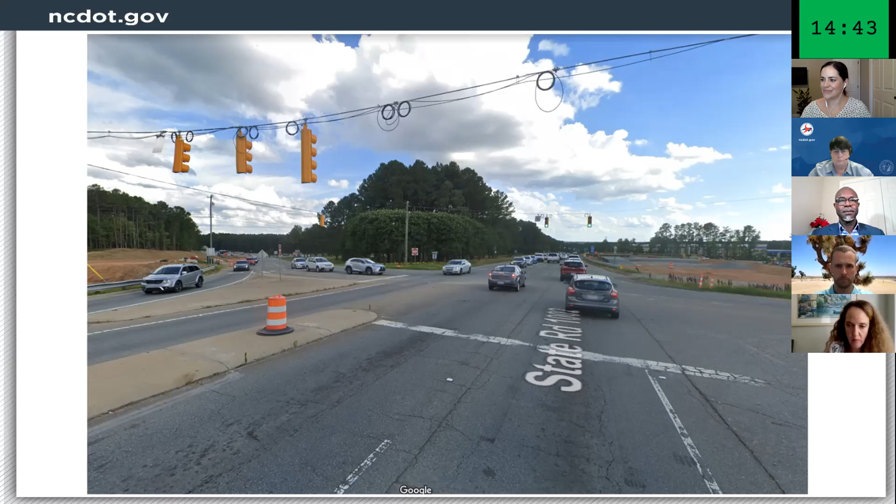Here's the thank you. All right, so kind of a theme today is out with the old, in with the new. Aviation Parkway interchange is our first topic. So out with the old: heavy congestion, I-40 westbound traffic exiting to southbound Aviation. Traffic consistently backed up to I-40, creating safety issues. The westbound I-40 on-ramp acceleration lane was too short, creating merge issues on I-40. Next. The 4-lane bridge cross-section was functionally obsolete and inadequate to handle the demands. Next.

So in with the new, a $36 million investment was let to contract in February of 2018 and provides the following improvements. I-40 westbound movement to southbound Aviation is provided by the new loop in the northwest quadrant. This loop opened in early 2020, 2 weeks ahead of schedule. I-40 eastbound to northbound Aviation has dual left turns. The new 6-lane bridge accommodates true dual through movements as well as lanes for exit and turning movements. This bridge was opened in November 2020. The westbound I-40 auxiliary lane connecting Aviation Parkway on-ramp to the off-ramp for Airport Boulevard has been constructed.

Although NCDOT was severely impacted by COVID through traffic volumes from a revenue standpoint, there were several 2020 closures associated with the construction that were aided due to the reduced volumes. So in early April 2020, traffic volumes were down 54%, allowing us to perform a weekend closure of both directions of I-40 to demolish the old bridge. And pre-COVID, I-40 between Harrison Avenue and I-540 carried between 150 and 170,000 cars per day. Next.

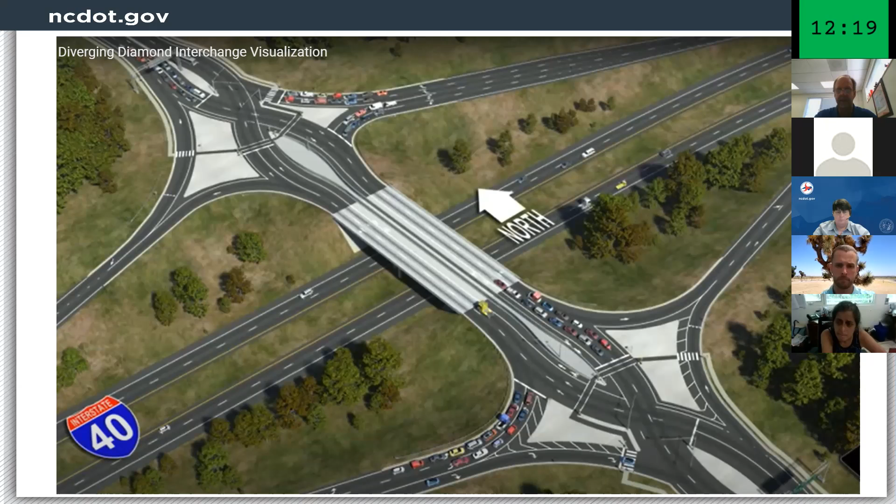Construction of a diverging diamond interchange. So the DDI configuration crosses Airport Boulevard traffic to the left-hand side of the road. Next. The traffic entering and exiting the interstate does not have to cross opposing traffic to make the turn. Basically, the left turns act as traditional free-flow right turns. This simplifies signal operations, providing for increased capacity. Next.

So although many DDI bridges are a single bridge, like the one seen here in the Charlotte area, our plans at Airport Boulevard call for 2 separate bridges which will be built on either side of the existing bridge. If you have not driven through a DDI, get ready. We have many more coming in the area, including 3 being built with the next 2 projects being discussed. The completion date for this project is February 2024.

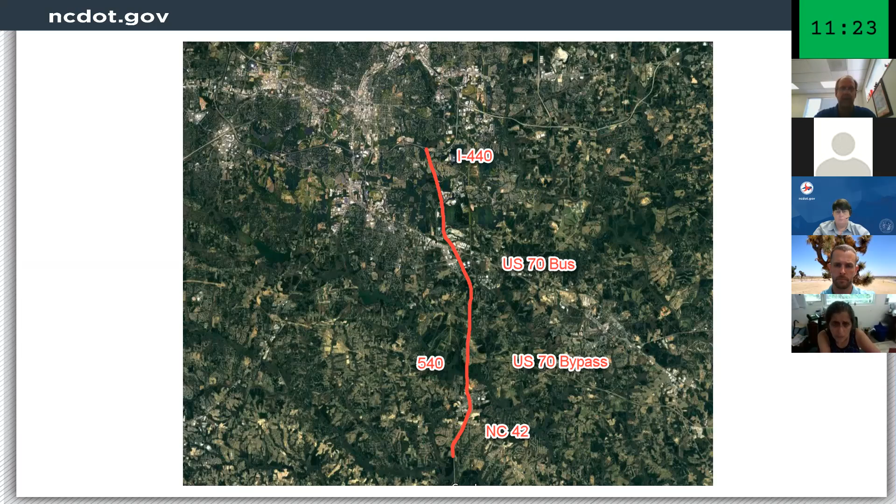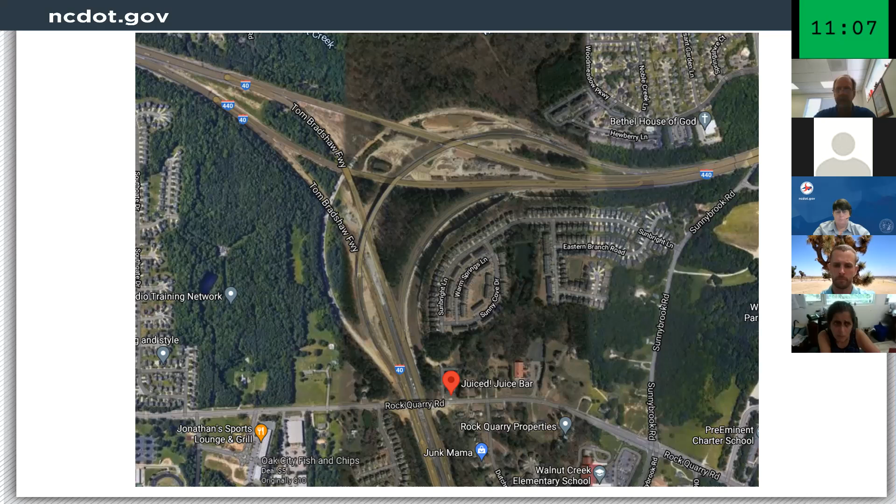Next. So we're also in the process of widening 14 miles of I-40 from I-440 to NC 42 in Johnston County. Next. This $360 million design build project will add 2 lanes in each direction of I-40. The design includes reconfiguration of several interchanges along the corridor. Here you can see the newly completed flyover ramp from 440 to 40 East, which shifted to the east from the original alignment. Next.

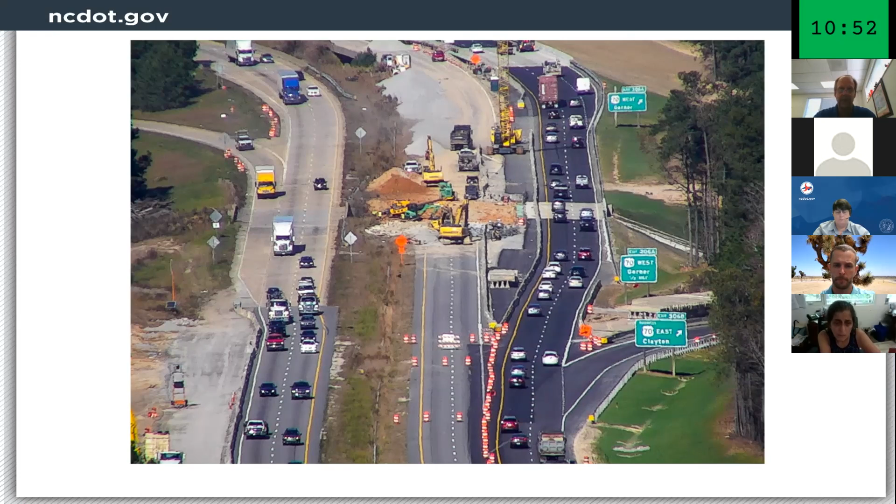So keeping with the out with the old, in with the new theme, maintenance of existing traffic is always a challenge: as you build new, you shift traffic, you demolish old, and you once again build new. Next. The project also includes the reconfiguration of the I-40 NC 42 interchange. It will be a diverging diamond interchange with additional access to Cleveland School Road. There will also be a diverging diamond interchange added at the Jones Sausage Road exit interchange area near the new Amazon distribution facility in Garner. Next.

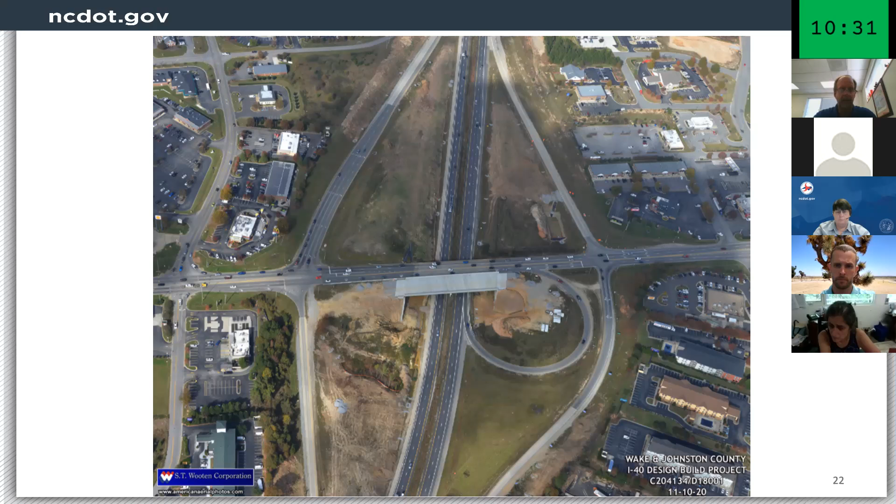So getting back to NC 42 at Cleveland School Road, these 2 areas are connected by a collector distributor system. So we're pushing to get the new lanes open from 440 to US 70 bypass by the end of next year, with the remaining work completion likely in 2024. Next.

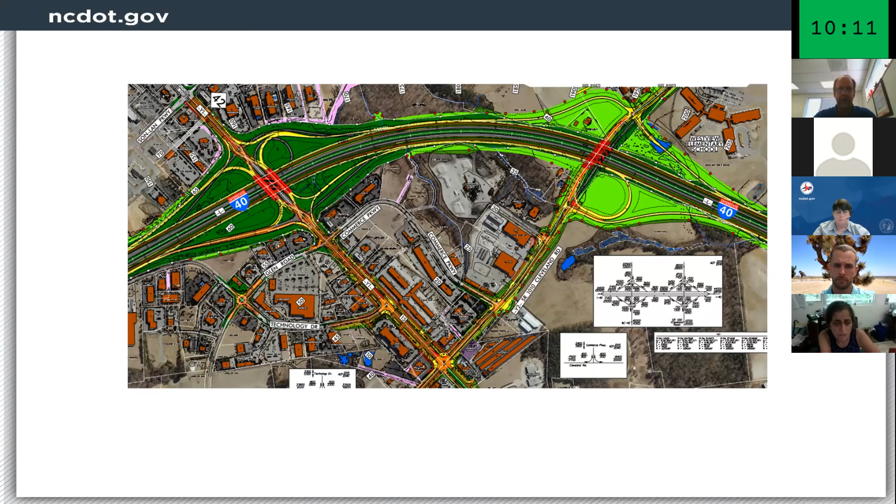All right, so the East End Connector in Durham County. So we're completing the East End Connector in Durham to provide a direct connection between the Durham Freeway and Miami Boulevard, US 70 and NC 147, 2 major east-west highways in the Triangle, and improve access between I-40 and I-85. Next.

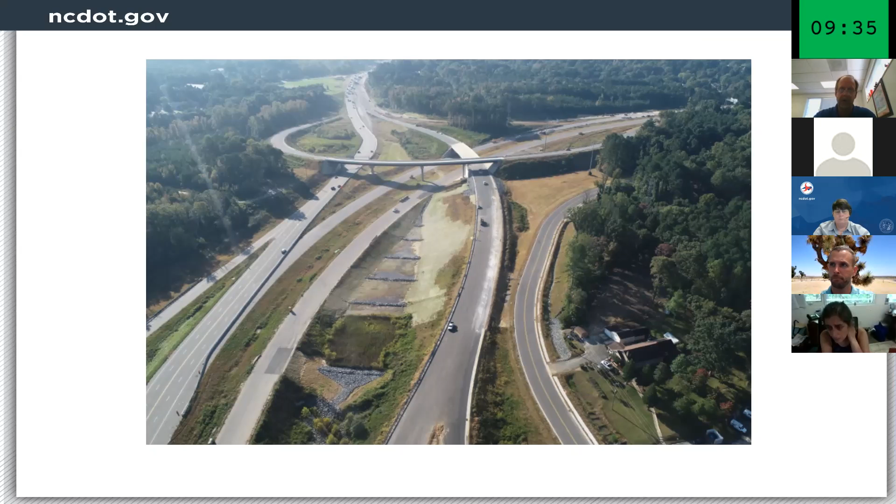The $142 million project began 6 years ago. Next. Although only about a mile separates 147 and 70, this project is complex due to maintaining traffic on 147 and 70. Majority of the work was bridge construction and coordinating with 2 railroad companies. Next.

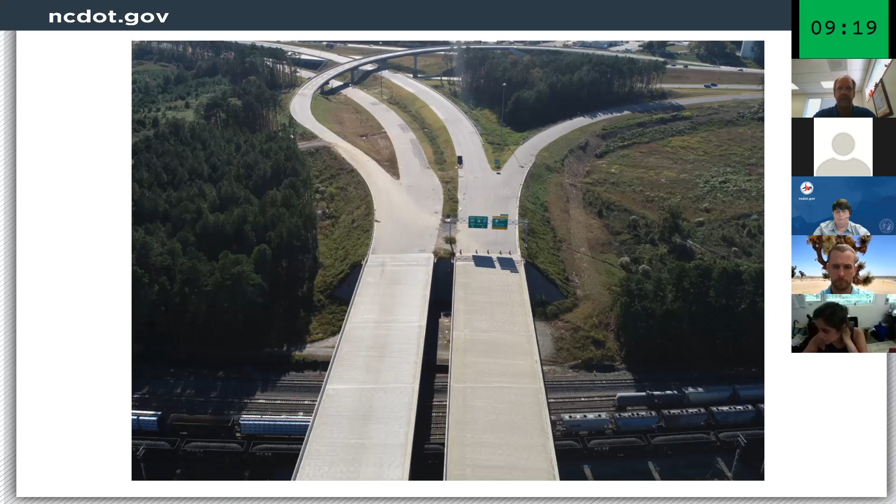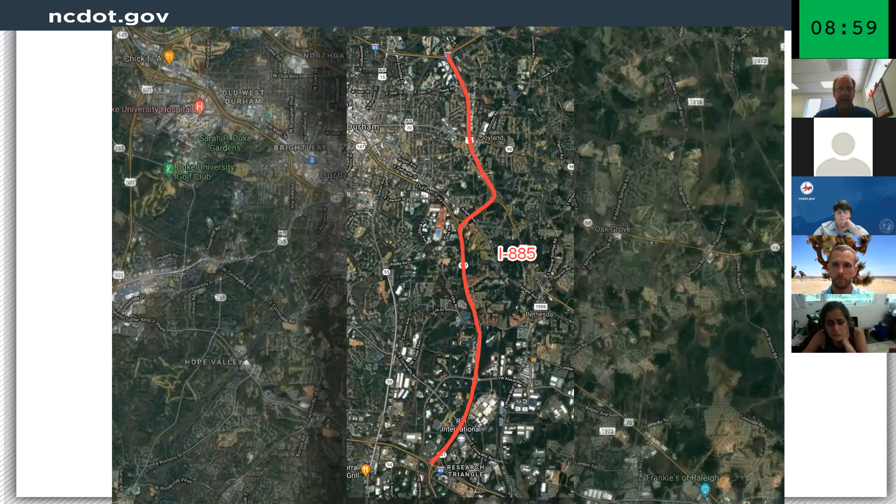Although we continue to push to open the connector by the end of 2021, a spring 2022 opening is more realistic. Next. As we place traffic on the connector, there's going to be a new route designation included. That's going to be I-885. Next. So I-885 will be signed from I-40 along current NC 147 through the East End Connector and then along current US 70 to I-85. Next.

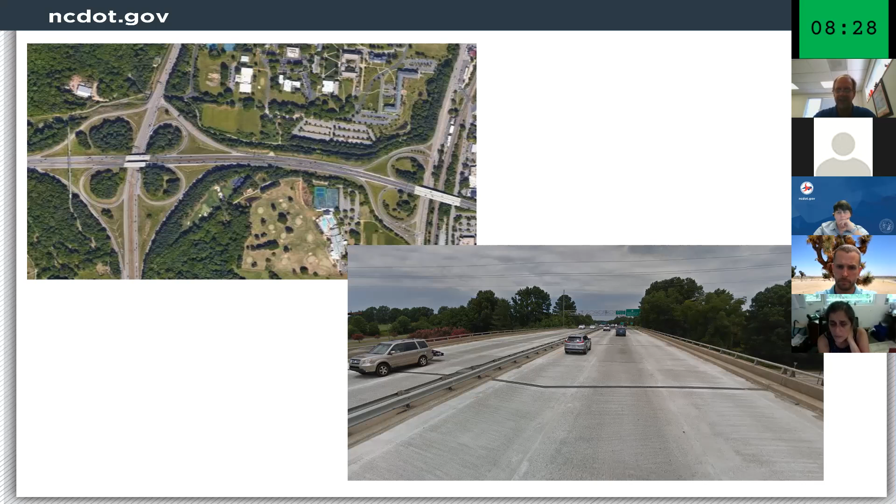Now we're going to transition to the Beltline project, U-2719. So out with the oldest section of I-440 built in the 60s from just north of Wade Avenue to south of Walnut Street. This project does not include redesigning of the I-40 interchange, but the old section of the Beltline was a 4-lane section. The pavement structure was at the end of its life. All the bridges were functionally obsolete. All the interchanges were outdated designs and had bottleneck congestion issues throughout the corridor. Next.

So this $400 million investment is being built by a design build contract awarded in October of 2018. Work began shortly later in July of 2019. So in with the new, modernization of the entire corridor, including pavement structure, bridges, interchange designs, and going to 6 lanes. Next.

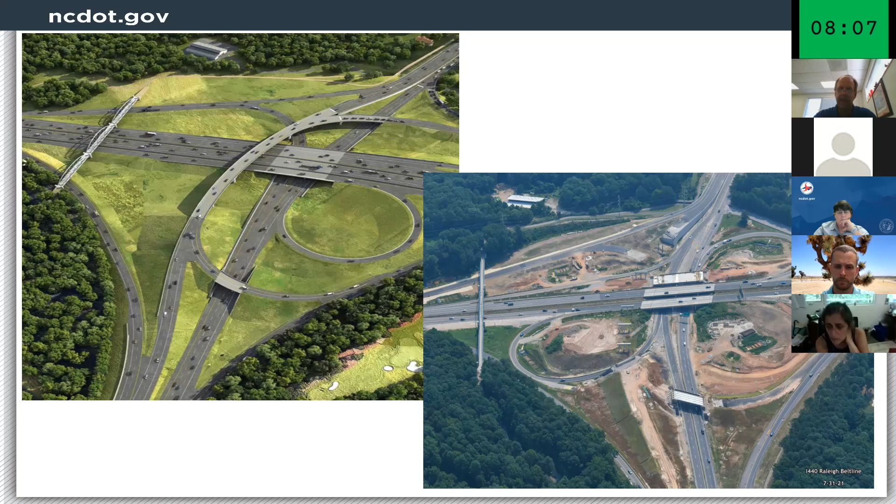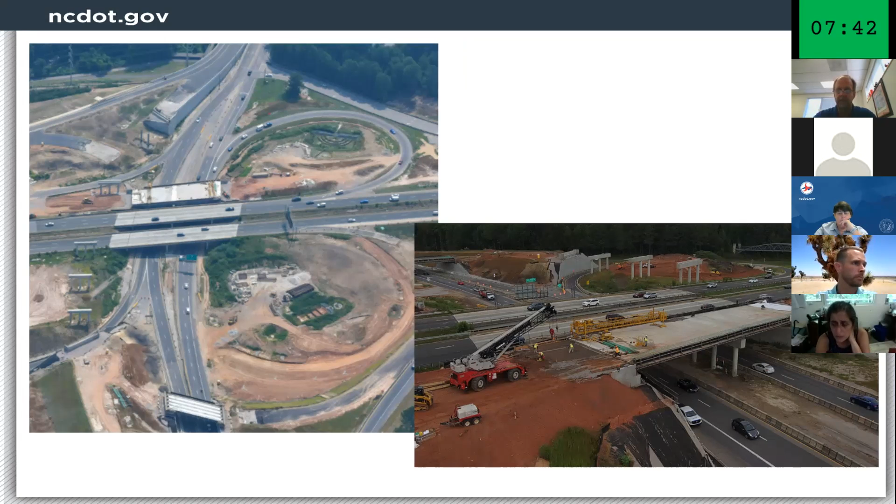Here at the Wade Avenue interchange, the existing interchange is served by 3 loops, which create slower speeds and weaving issues. The new interchange will only have 1 loop in the southwest quadrant. The current main line is served by 2 bridges. The expansion creates a 3rd bridge, with the westernmost bridge being part of a collector distributor access for the interchange with Hillsborough Street. Next. Moving down to the Hillsborough Street interchange, the design of the interchange is really just a larger footprint of the current interchange to allow for additional lanes on 440 and better movement between Wade Avenue and Hillsborough Street. Next.

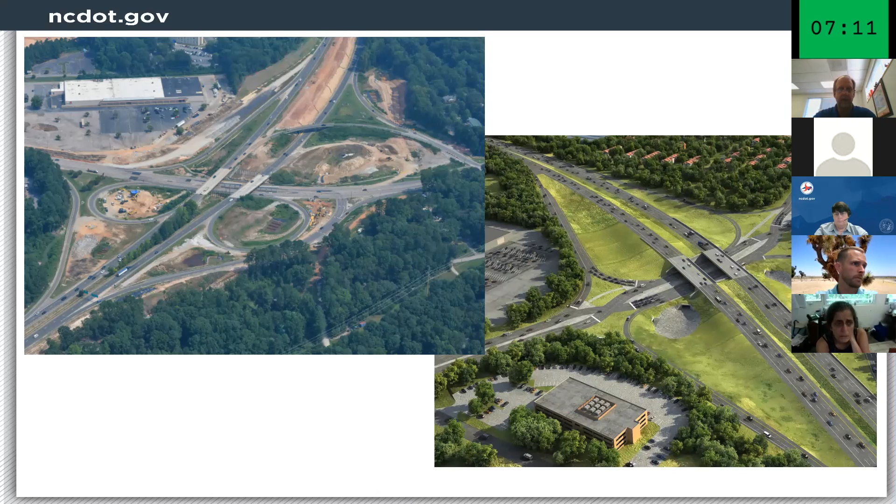The proposed Western Boulevard interchange probably offers the most unique change along the corridor, moving from the current flyover and 3-loop design, which creates many weave issues and slow exits and merges, to a new diverging diamond interchange. Next. Jones Franklin Road interchange. This proposed design modifies the loop in the northeast quadrant and aligns the southbound 440 off-ramps with Fort Sumter Road. Next.

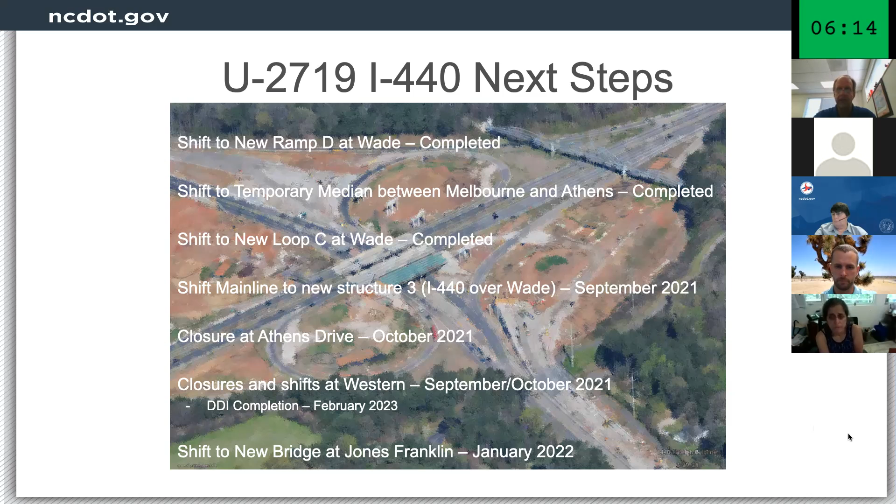So on this slide, you can see some recently completed aspects of this project, shifting to the new Ramp D at Wade Avenue, shifting to the temporary median between Melbourne and Athens, shifting to new Loop C at Wade Avenue. Upcoming work includes shifting the main line to the new structure at Wade Avenue in September of this year. Closure of the Athens Drive Bridge, and that'll be demolished and rebuilt, starts in October of this year. And then the Western Boulevard DDI closures and shifts start later this month and in October; hopefully the DDI completion will be February of 2023, and then shifting to the new bridge at Jones Franklin in January of 2022. Next.

So Beautify, Fortify. Now, everybody remembers Project Fortify, which was a project that rebuilt 11.5 miles of I-40 in the Beltline, which included replacing pavement and rehabbing 14 bridges. And we took that project, and you could apply 1% funding to a landscape project afterwards. So we had coordination with RTA, Convention Visitors Bureau, the City of Raleigh, and DOT staff. We developed plans that maximize visual impact at a reasonable maintenance cost. We didn't want anything that was going to be a struggle to maintain.

So tree removal was part of it, to the clear zone, removal of undergrowth at all wooded interchanges, planting a variety of new trees to add color and enhance the interchanges, a unique design at each interchange, incorporated a few wildflower beds that DOT will maintain, and then incorporated turf management of grass within the quadrants. All the plantings have been completed at this point. They were turned over to the City of Raleigh earlier this year for annual maintenance. Next.

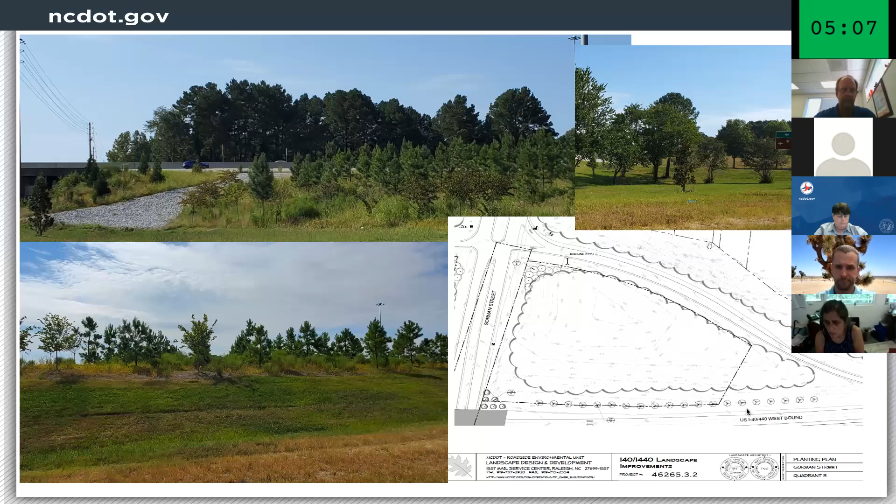Our own forces pick up litter almost every single day, along with other volunteers, and then our Sponsor a Highway program, which allows businesses, organizations, and individuals to sponsor litter removal along our roadsides. Got to promote our fall litter sweep. It kicks off tomorrow, for a 2-week period. So if you have not done so already, please volunteer to pick up litter in your area over the next 2 weeks.

Earlier this year, a litter task force was created: Joey Hopkins, my predecessor in this position, along with Joe Milazzo, Denny Edwards with Visit Raleigh, Jim Bealey with Umstead Hotel, Eric Kirks with Johnston Automotive, who's a huge Sponsor a Highway participant, Bill Davidson with GFL Environmental, Joe Diener with Republic Services, and representatives from the home builders of Wake, Durham, and Orange counties.

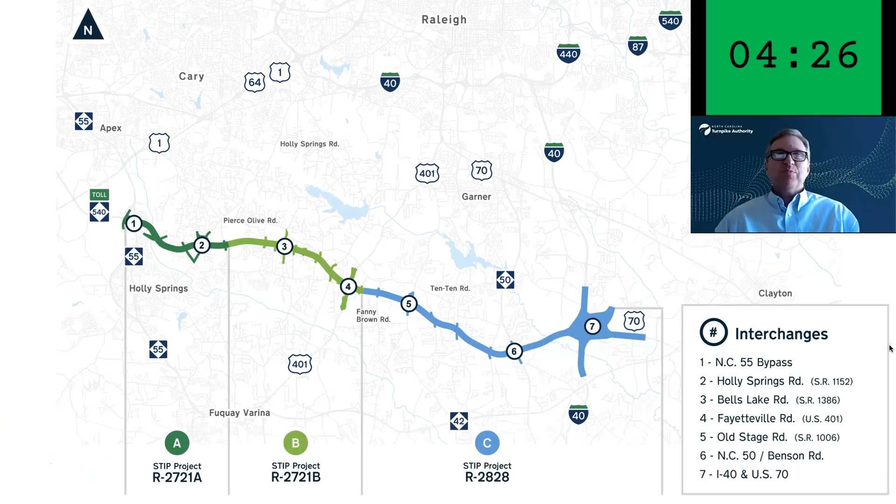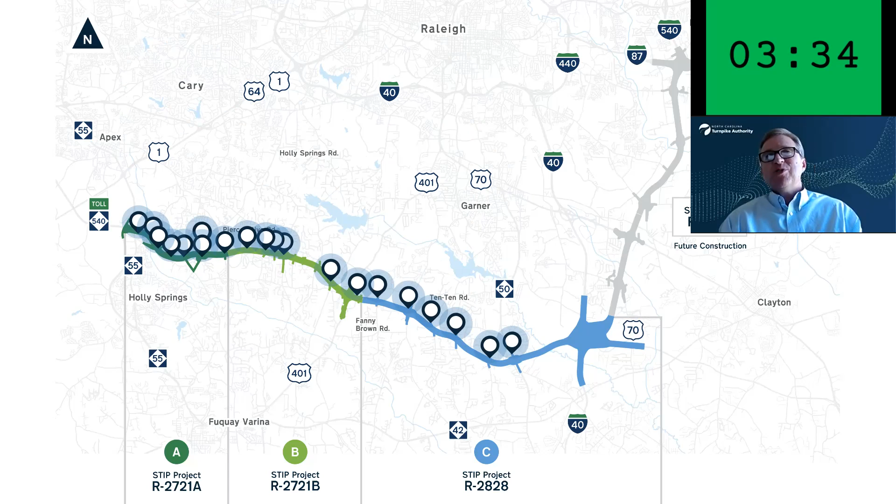Our next slide shows some of the collaborations and outcomes with municipalities. The next click is an animation—you'll see pin drops, which are bike, ped, and multi-use path accommodations being facilitated in the project. The next slide will show a list of where those are, and we'll hit that briefly to show a pretty significant list of accommodations. But a picture's worth 1,000 words, so let's jump into the project photos.

The next slide is at NC 55. You may be familiar—we have one bridge now, but on the bottom side, the foreground of the photo, you see the middle bent for that particular structure and the two end bents that have been completed. We're actually planning on setting girders there within the next couple of weeks.

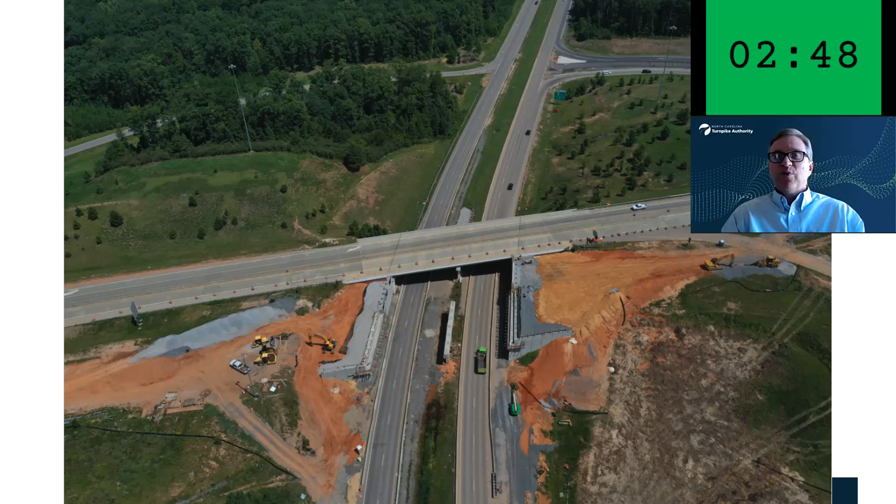I did want to mention too, on the previous slide I skipped, when we're talking about the dollar amount, I wanted to let everybody know that out of those contract amounts, $75 million is committed to DBEs and small business firms. When you take into account some of the pre-construction right-of-way activities, we're actually over $80 million. Okay, next slide. Thank you, Natalie.

This is East Williams Street. You may look and say the bridge looks kind of asymmetrical, off-centered there. The reason being is because we collaborated with the municipality. They've got a future expansion project here, so we're building our bridges long enough to accommodate that. The new lanes of East Williams Street will be on the opposite side, the top side of the photo.

In the next slide, we were talking earlier about pedestrian accommodations. There's actually two culverts in this photo. One is backfilled just above that red line. The one highlighted by the bracket is the pedestrian culvert connecting Wood Creek, the two pieces of the Wood Creek community. We collaborated on this with Holly Springs.

The next slide is going to show you Sunset Lake Road. We've got a temporary detour that's almost ready to be opened. We're waiting on a few utility poles to be cleared, and we actually crossed Sunset Lake Road twice, and this is one of those crossings.

The next slide is, here we go. Next slide, please. It's not moving on my screen. Okay, it actually jumped a couple, but that's fine.

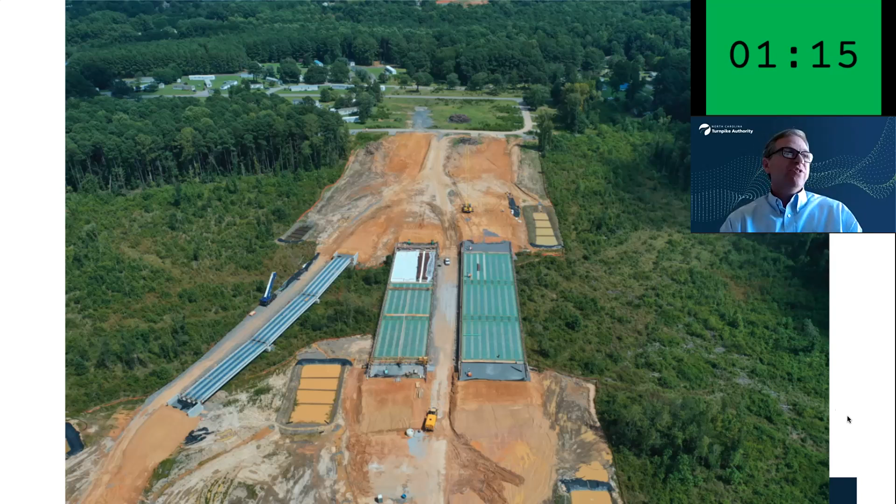This is east of Bells Lake. We're spanning a wetland and environmentally sensitive area, so in addition to the human environments, we're also sensitive to the natural environment. You're going to see two different photos of bridges that do such, and this is just east of the Bells Lake interchange. The next slide is going to be a pair of bridges that are future Camp Branch Greenway bridges. That greenway is going to be built in the future, but again, we're accommodating that expansion later. The next slide will show you that not all the work is done during the day.

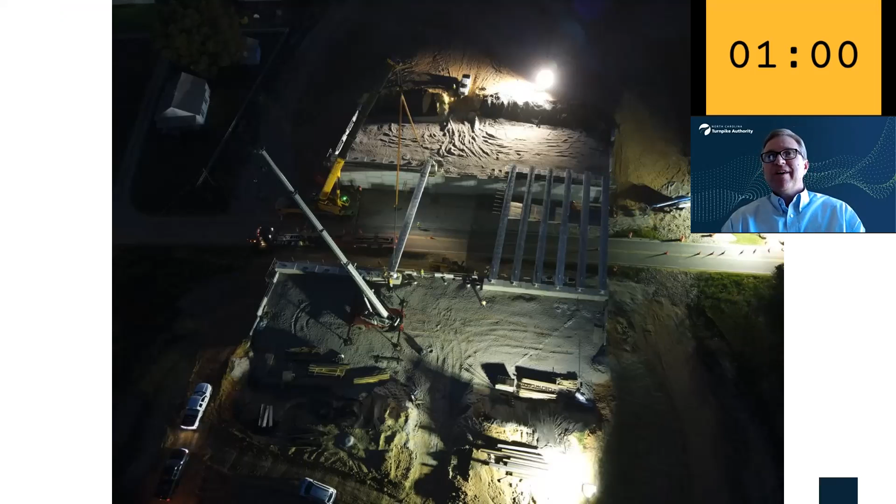This is setting girders on Jordan Road, and this was done at night. So we got some aerial shots of that to show you that we are doing things to minimize our impacts to traffic. Next slide. If you look on the right side, you're going to see some of our noise walls going up.

This is in the Sauls Road area. And then the next slide is going to be a trestle. It's got a couple of trestles in there for building the bridges near I-40. This is part of the Swift Creek tributary.

Natalie, if you'll jump ahead two slides, I did want to mention public outreach efforts because I'm short on time. One of the things we like to do is stay in contact with the folks along the corridor. We didn't let the pandemic stop that. We've gone through virtual meetings, postcards, Nextdoor posts to make sure that people are getting the latest and greatest information. Some of the ways they can do that are shown on the next slide. We have a dedicated email account, 800 number, and Twitter handles that you see there.

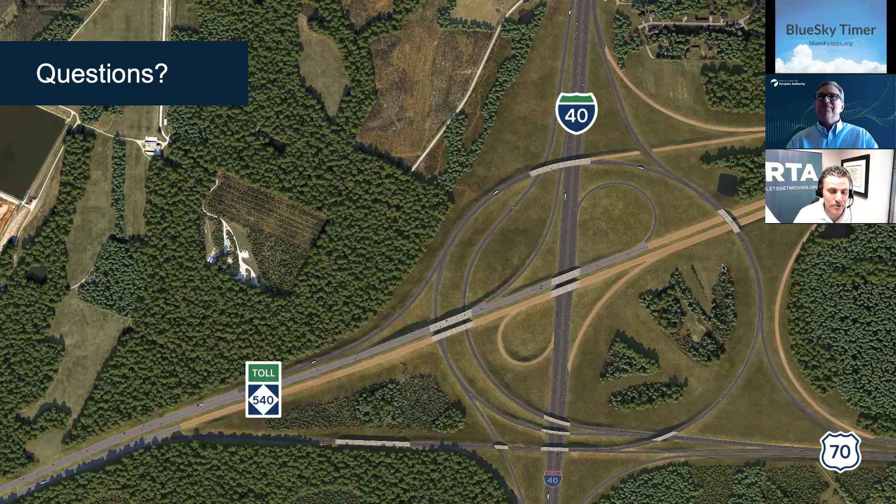Well done on a great friend, great organization, and great project. We are so excited about seeing the progress of I-40, and we do appreciate your hospitality there.

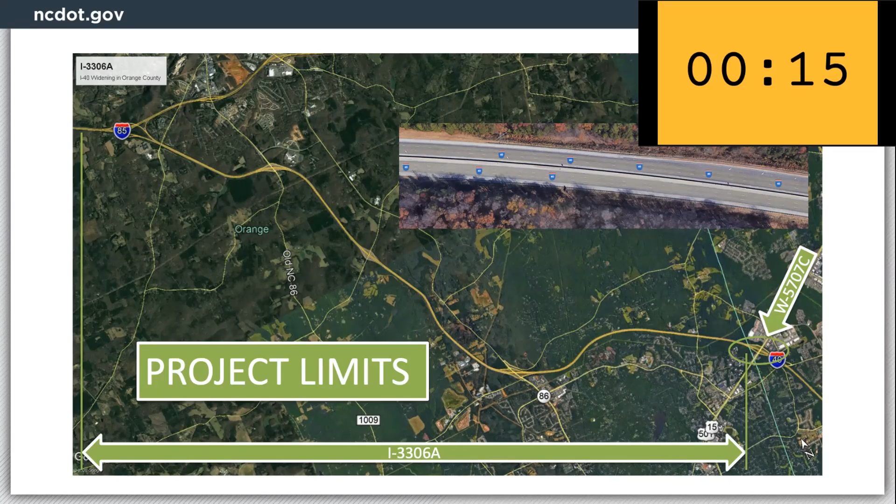The W5707C is a safety project that removes the left lane drop and instead takes the right lane drop westbound on 40, dropping it into 15-501. Next slide.

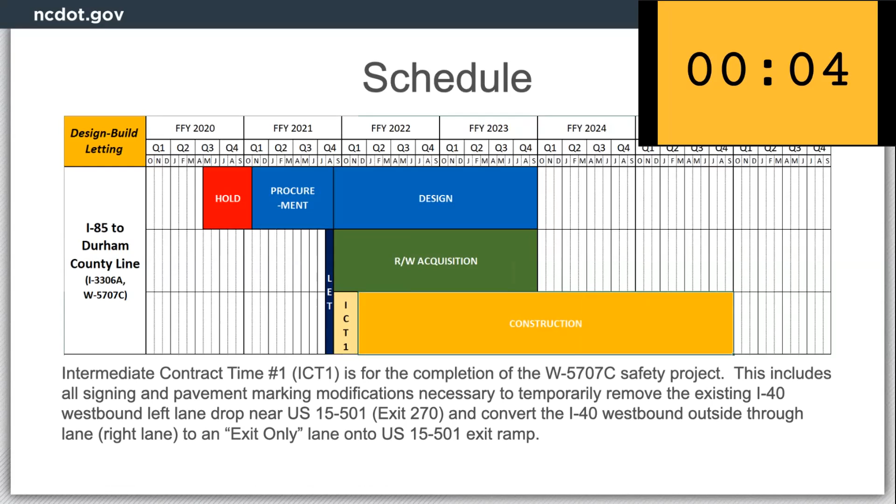The schedule, quickly: we already talked about the hold and the procurement for design build. The design build team is now in design and right-of-way acquisition. The intermediate contract time, or ICT, for the completion of the safety project will be the end of November of this year, and the project is anticipated to complete construction in September of 2025.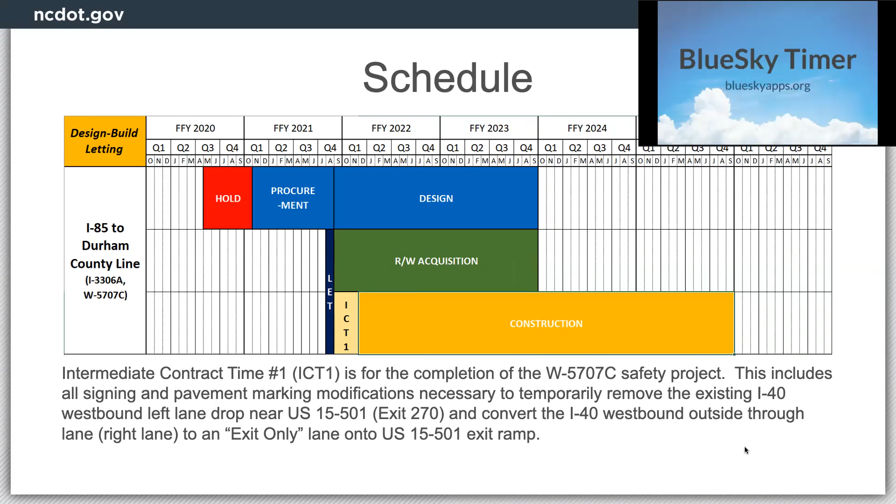That is a great summary of a needed project. That'll be the last 2-lane-each-way section of the freeway between Johnston County all the way over west of Winston-Salem. So what a great asset, not just for the triangle, but for the entire Piedmont Crescent or Metropolitan Crescent of the state. We are very excited about that one as well.

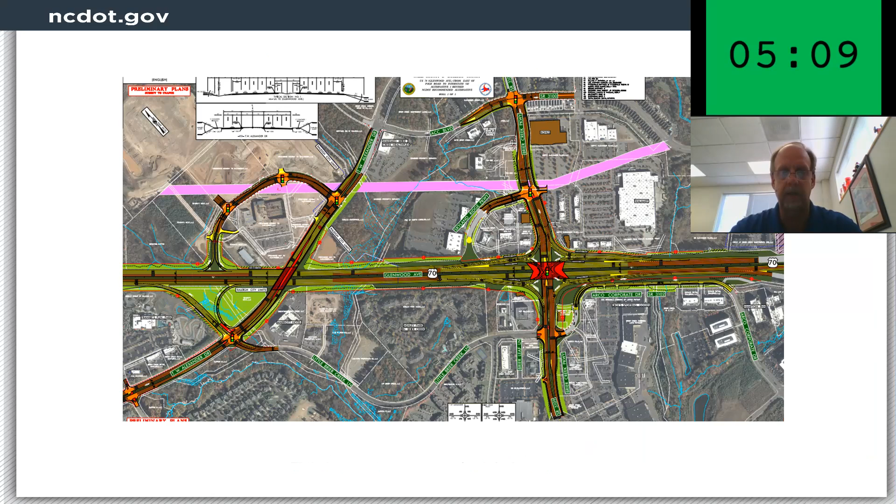The preferred alternative was chosen in 2019 after 2 rounds of public meetings in 2017 and 2018. It's called Alternate 2 Revised. It creates an interchange at Brier Creek Parkway and TW Alexander. Next.

There will also be an interchange to the west of this location at the extension of Aviation Parkway at US 70. The project is planned for design build letting in November of 2024. Next.

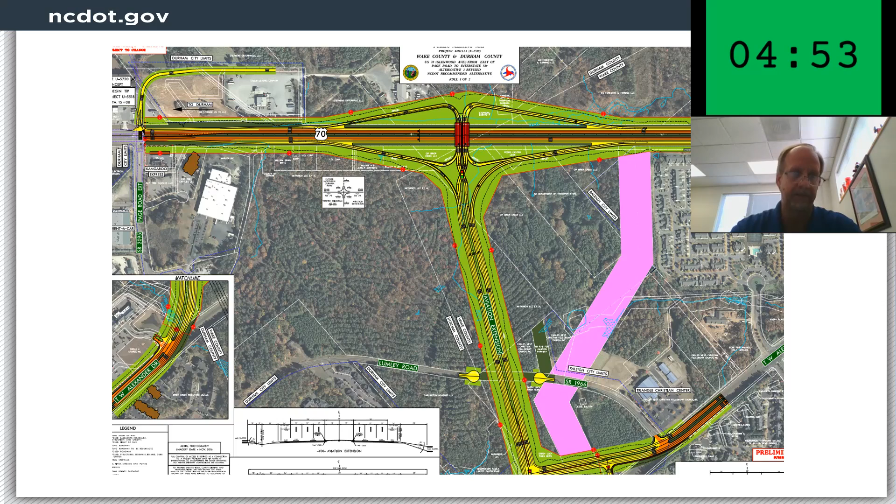Moving into Durham, U5720 will tie into U5518 and extend the freeway to the new 885 interchange. We are currently developing the service road plans with the intention of holding additional public meetings this winter. Next.

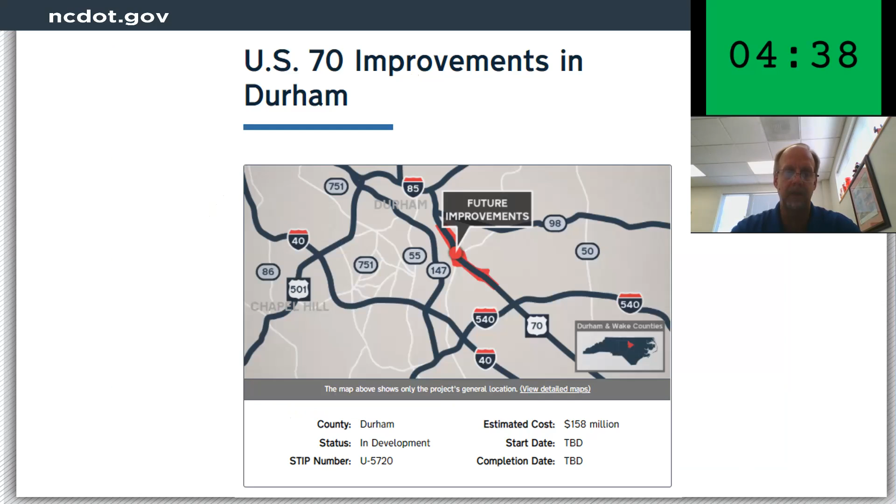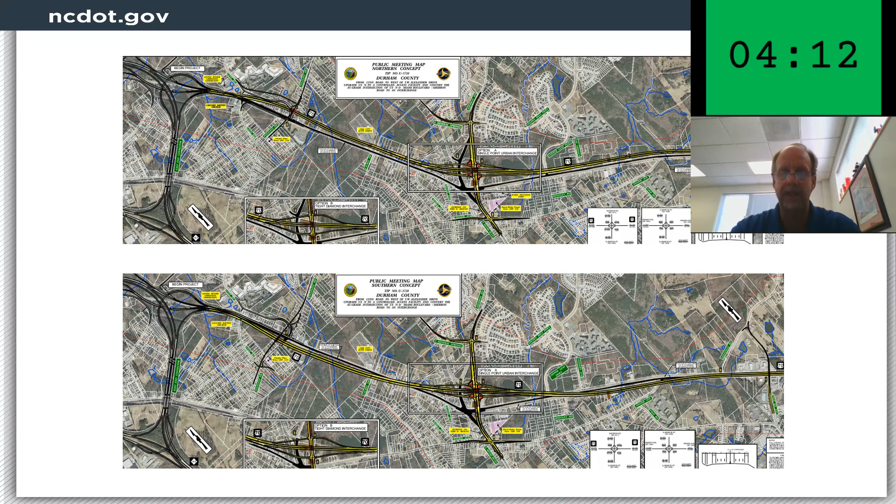There are currently 2 different alignments, the north and the south. The goal is to have a preferred alternative selected in 2022 and continue working toward the environmental document. We will also continue to coordinate with Durham County and the city to assure adequate connectivity for all modes of transportation. The project schedule is to begin right-of-way purchases in July of 2026. However, construction remains unfunded in our current STIP, which goes through fiscal year 2029. Next.

Moving over to US 1: U5307 is the conversion of US 1, better known as Capital Boulevard, to a freeway from 540 up to Wake Forest. Next.

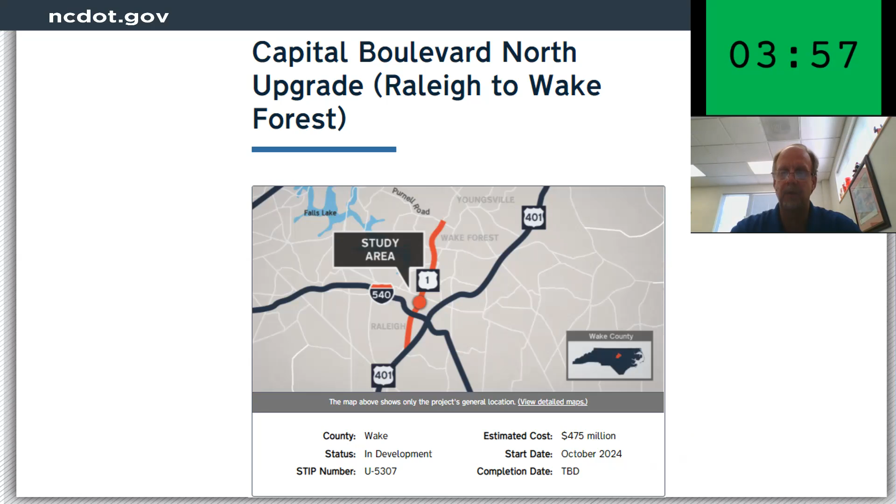Currently, we are working on the design of the service road network, and completion of the environmental document is scheduled for next spring. We plan to have a public meeting this fall. It won't be September, but later this fall.

The overall project is broken into 4 sections. The A section runs from 540 to north of Durant, Perry Creek Road, planned for a design build let in October of 2024.

About a $291 million investment. The B section extends it to north of Burlington Mills Road, scheduled for right-of-way in October of 24, construction letting in October of 26, a $165 million investment. The next section goes to NC 98 Business, right-of-way in 2024, construction letting October 2026 as well, $142 million investment.

The last section up to Wake Forest has right-of-way in 2028, and the construction letting is unfunded in our current STIP.

Moving over to the US 64 corridor, U5301 includes improvements to 64 from US 1 in Cary to just west of Laura Duncan Road in Apex. A preferred alternative was chosen after public meetings in 2019.

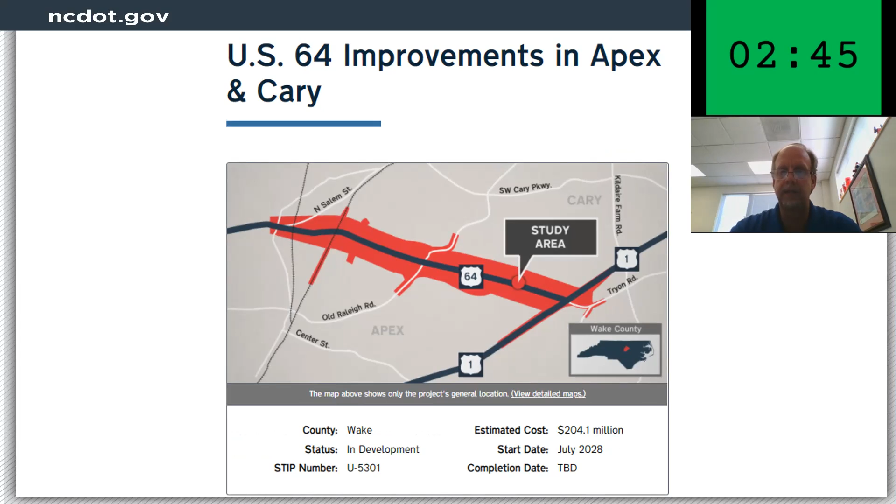This project will improve traffic flow and safety along the corridor by adding an additional through lane in each direction, creating a tight diamond interchange at both Laura Duncan and Lake Pine Drive, as well as grade separating Shepherd's Vineyard Drive.

Moving east, the corridor takes on reduced conflict intersections until the grade separated modified quadrant intersection at Edinburgh. The current schedule for this project is right-of-way in July 2025 and construction letting in July 2028.

I appreciate the opportunity to bring you up to speed on these 3 projects. Thank you.

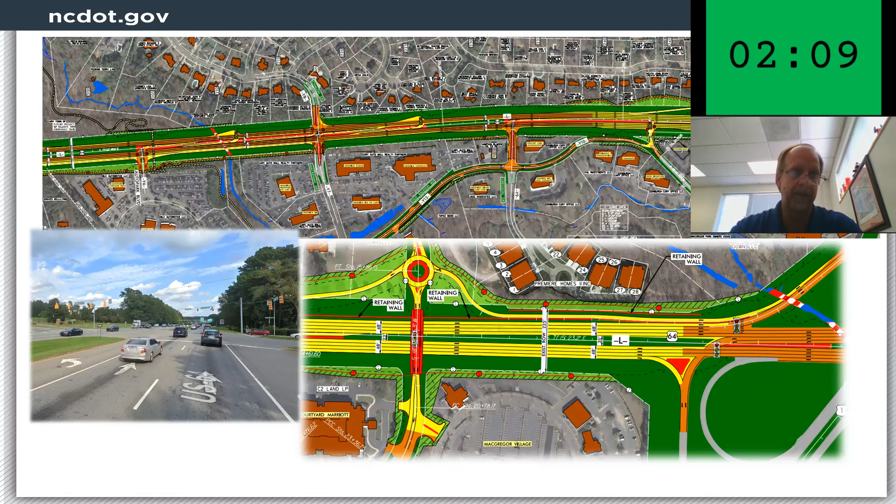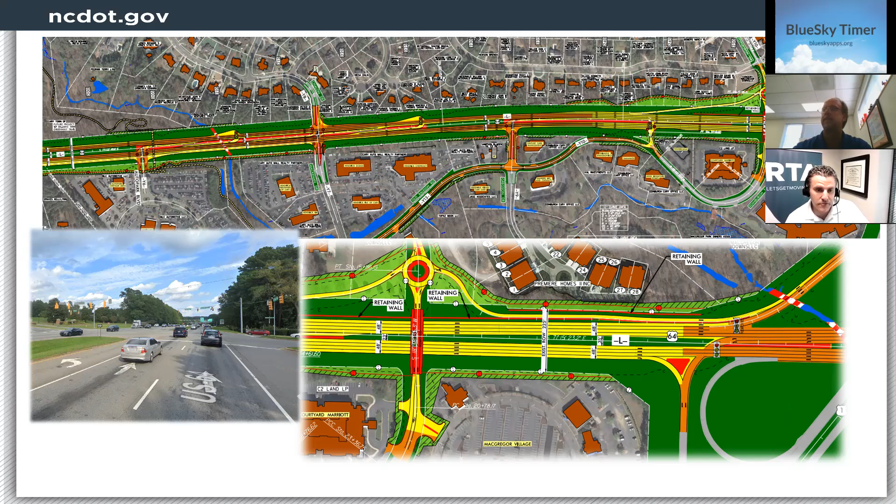We appreciate you taking the time to do that, Brandon. And these are fantastic projects at various timings before construction begins, but all coming. The business community has been supportive of those for some time, all 3 of these.

We would love to see them accelerate. To do that in some ways is going to require a funding piece, which will come up a little bit later in the conversation.

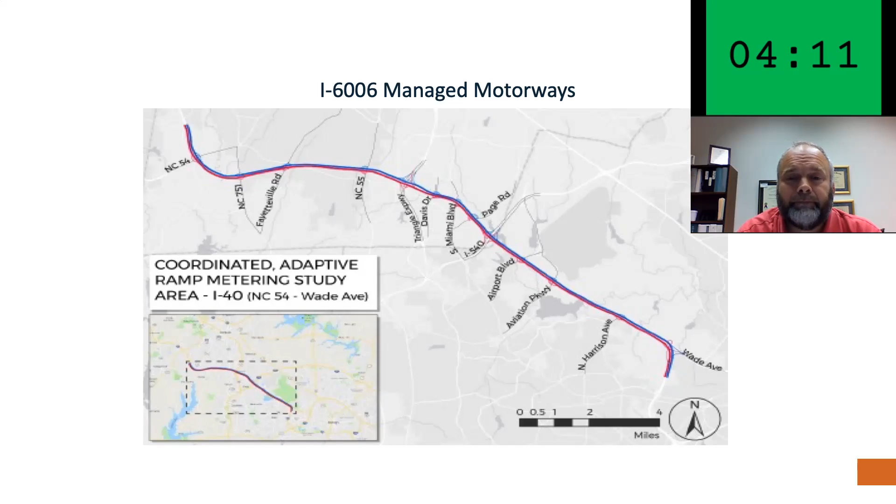And there you see, we call it CARM, coordinated adaptive ramp metering. It's where you put ramp meters that are coordinated between each other so you can maintain the throughput on the freeway, controlling the number of vehicles so that you don't reach or pass beyond capacity. The whole point of CARM is to keep you at or close to the edge of that line, but not cross over.

You provide storage on the ramps to accommodate queued vehicles, and coordination between ramps so that no one ramp becomes excessively queued, allowing you to share the capacity. Next slide.

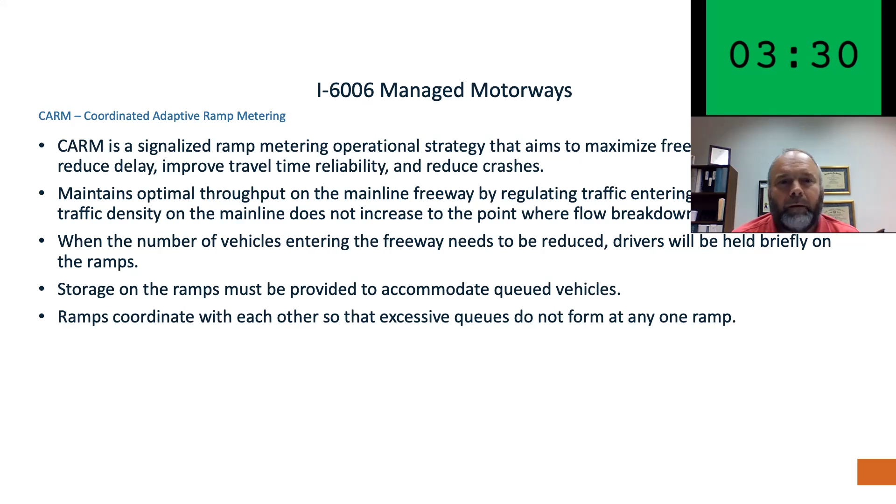Another part of the managed motorways study was advanced traffic management system mechanisms, or ATMS. That could include dynamic lane assignment, dynamic speed limit, dynamic shoulder lanes, dynamic junction control, or queue warnings.

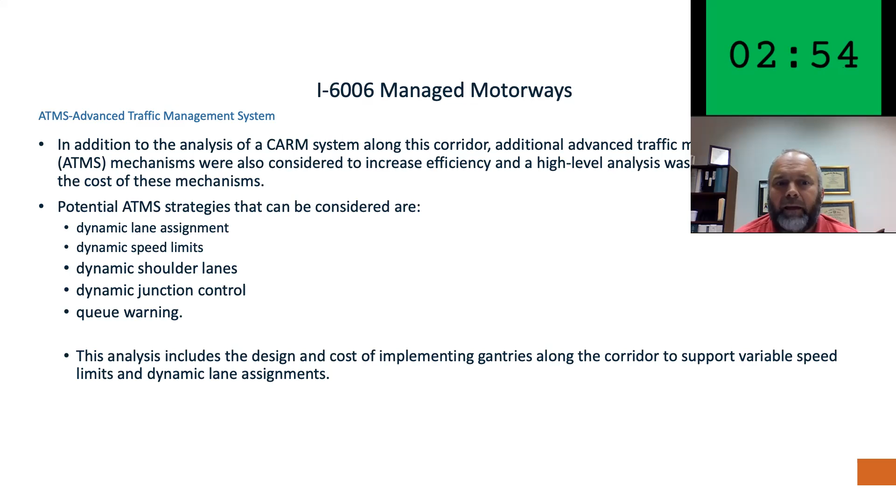In the design and estimates we put forth for the I-6006, we had gantries so that you could support the potential for dynamic speed limits and definitely dynamic lane assignments. Next slide.

In the total delay, we were seeing approximately a 22%, almost 23% improvement in delay for total delay. Average speed went up by about 6, almost 7%. And the delay per mile traveled was a reduction of about 23.5%. Realize these are conservative, because once you go beyond capacity, you can actually almost lose 50% of your capacity once you get into breakdown. So these numbers right now are conservative, but that's what the analysis was trying to indicate, what we thought the potential benefits would be.

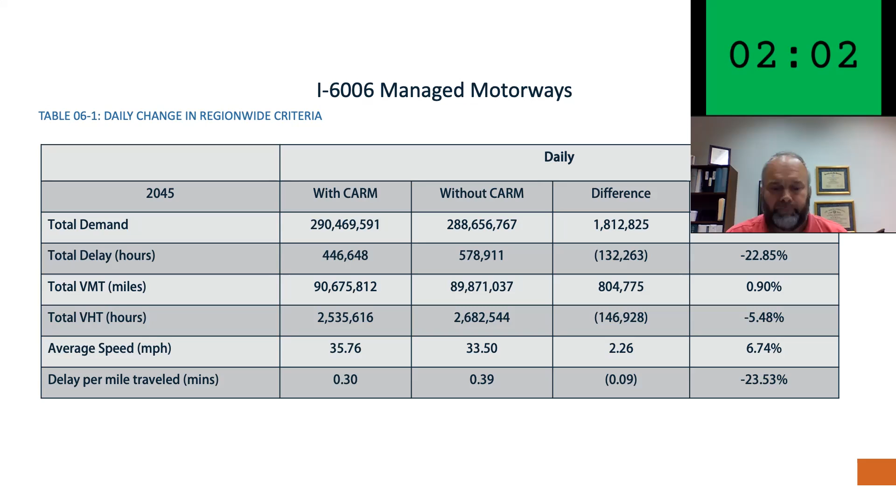Next slide. And that was it.

Back to you, Joe. Got it. Well, that's a lot in a short amount of time. Let's get moving with that for sure.

I got a question that actually did come in, a direct question from me, which is fine. Are there any studies currently underway to accelerate any of these projects? Whether it's this managed freeway, managed motorway concept, or bringing this back towards some of the other ones, such as the US 70 reconstruction, the US 1 conversion to freeway, or 64 upgrades. Are there studies underway, not so much to study the project, but ways to accelerate these projects where traffic is problematic now and going to continue with some of the new economic development projects coming in there? Is that work actively happening?

I'm not sure if that question should be directed more towards yourself, Derek, when you look at the long-term pieces, or maybe that's something we hold for a little bit later on. It also could be for Brandon himself as our division executive. So I'll leave it. Derek, any initial thoughts on that? Or Brandon, if you'd like I would defer to your commentary? Yeah, okay, that sounds good.

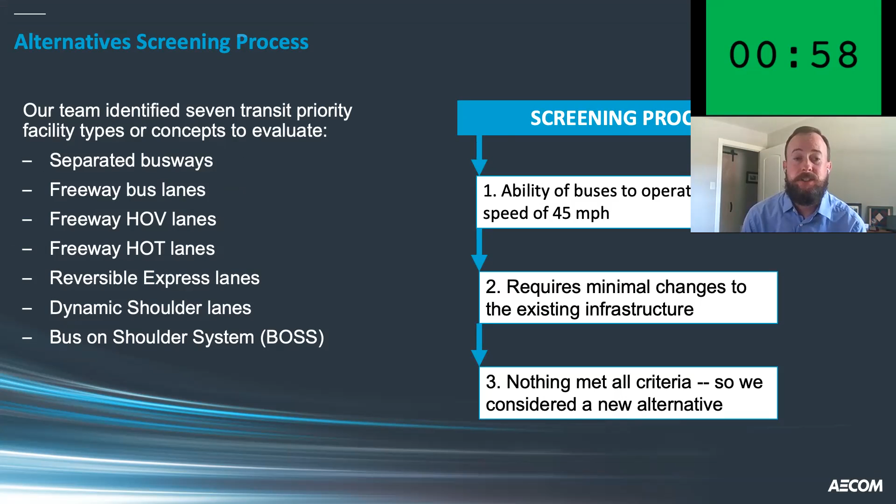We started our alternative screening process by looking at the potential transit priority solutions that were screened based on 2 criteria: the ability to allow the buses to operate at a speed of 45 miles per hour, and the ability to maintain or require minimal changes to the existing infrastructure to keep costs lower and to decrease the implementation time. The result was none of the solutions on this slide actually met all criteria.

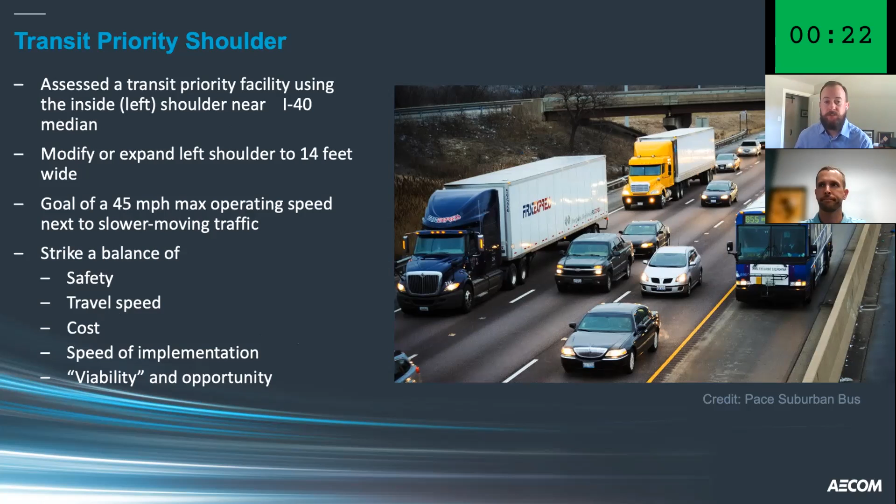Next slide. So after our initial analysis did not reveal a good solution, our team decided to further explore a bus on shoulder option that could attain a higher speed of 45 miles per hour. The result was a transit priority shoulder that uses the inside shoulder of I-40. Note that the existing BOS program operates at a maximum speed of 35 miles per hour on the outside shoulder. To implement this concept safely, the inside shoulder would need to be expanded to 14 feet to allow for sufficient buffers. Next slide.

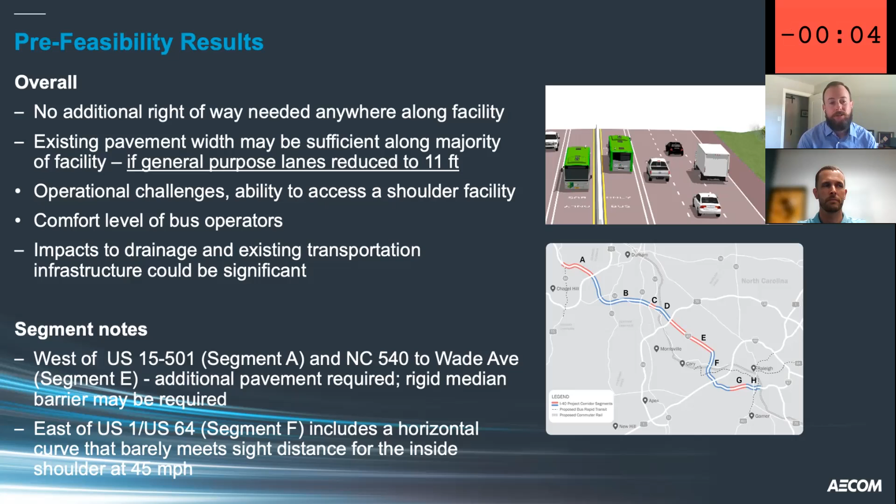The results of our pre-feasibility study showed that overall no additional right-of-way is needed. Our recommendation is for a full feasibility study to be completed to further vet out potential issues and evaluate costs. HNTB is currently working on a feasibility study for these 2 segments, and I'm going to turn it over to Andrew to discuss their work. All right, thanks, Corey.

Can you guys hear me? Yes. Awesome.

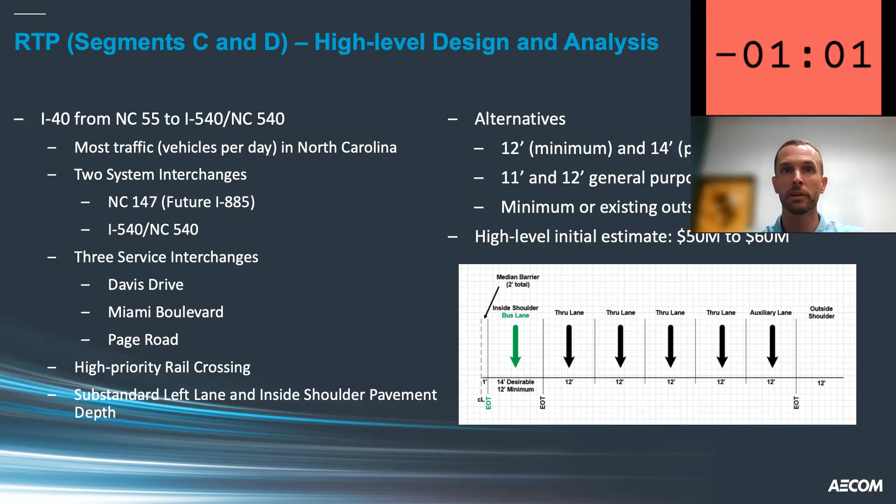All right, so we took a quick look, a high-level estimate look at the section of I-40 between NC 147, future 885, and then I-540. This is a critical segment of I-40, one with a lot of constraints, a lot of existing interchanges, and so we wanted to get an idea of what this could cost. We looked at several scenarios, several different lane widths, and came up with a high level initial estimate of 50 million to 60 million just for this section, depending on the lane widths and potentially some design exceptions if we can get into that. So yeah, that's basically what we did. Just a small nugget of the overall study that AECOM did. All right, next slide. I think that's it.

All right. Yep. Excellent work. And you're just going to continue on here with the next piece. Yep. Good job. Keep on rolling. All right. Sounds good. All right.

Next slide. All right. So HNTB has been looking into modernizing I-40 between 540 and the Durham Freeway. We've been looking at this over the course of the last year and a half, 2 years. So it's brought about a lot of interesting conversations between clients and stakeholders and other members of the community. Next slide, please. A lot of the characteristics are out there in front of us today. It has the highest AADT in North Carolina, close to 200,000 vehicles per day back in pre-COVID times. Traveling this every day, I can tell you that it feels like it's getting up to there again. So that's good for us.

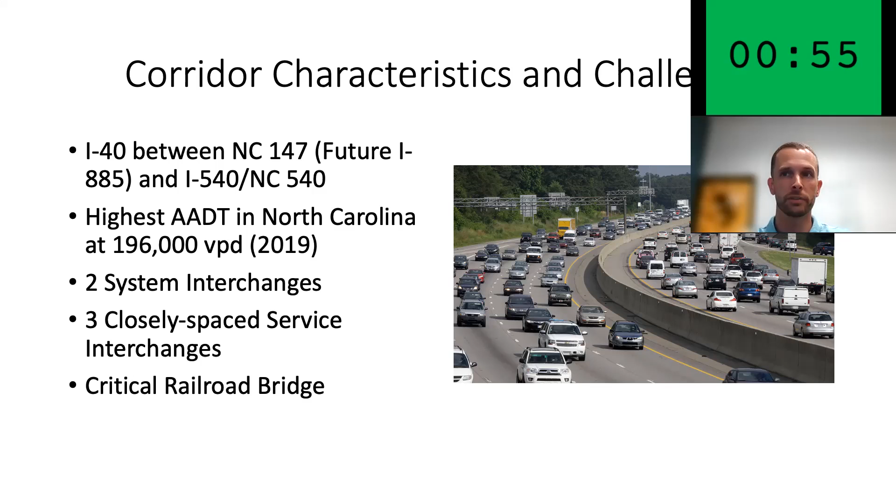Good news. We have 2 system interchanges, 540 and NC 147. We have 3 closely spaced service interchanges, obviously with Davis and Miami and Page, and a critical rail bridge that is just west of Miami Boulevard. That is a big piece of this study as well. All right, next slide. The current design concept is based on one-way frontage roads that travel along each direction of I-40. There are slip ramps to and from frontage roads that provide access to and from 40. Tight diamond configurations minimize right-of-way impacts. And then the loops are removed as well. All right, next slide.

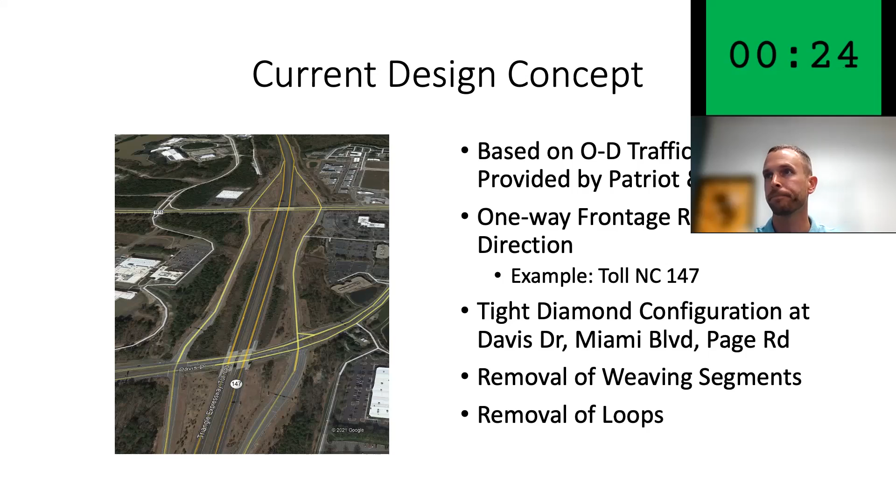Fantastic. Great presentation, Andrew, and also great presentation again, Corey, in the previous one. Very excited to see that concept. We all know that's the most used section of any freeway in the state. So getting it modernized, making it safer would be good. It's a very good design. Excited to see that thing move forward.

Speaking of I-40, I want to clarify something. Earlier, somebody sent me a note. I really appreciate that. I had mentioned that the I-40 widening in Orange County would get us to more than 2 lanes each way from Johnston all the way to Winston. It's not quite right. There is a gap between PTI, or Piedmont Triad International Airport, and the east side of Winston-Salem.

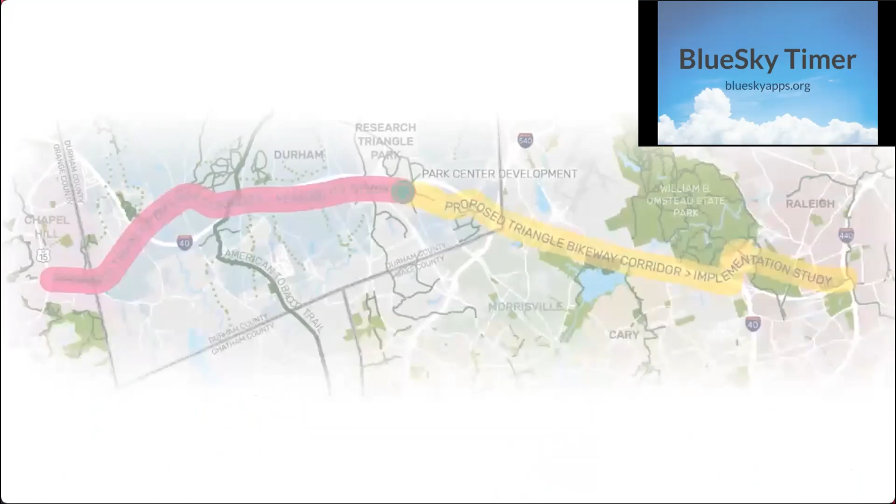Welcome to the Triangle Bikeway Study, a detailed evaluation of a regional biking and pedestrian facility connecting each jurisdiction along the I-40 corridor from Chapel Hill to Raleigh. All around the country, communities and state DOTs are looking at highway corridors in a new way, as valuable resources to move people, not just cars. Highway corridors are being activated to carry transit, bikes, and pedestrians while maintaining traditional and growing highway functions.

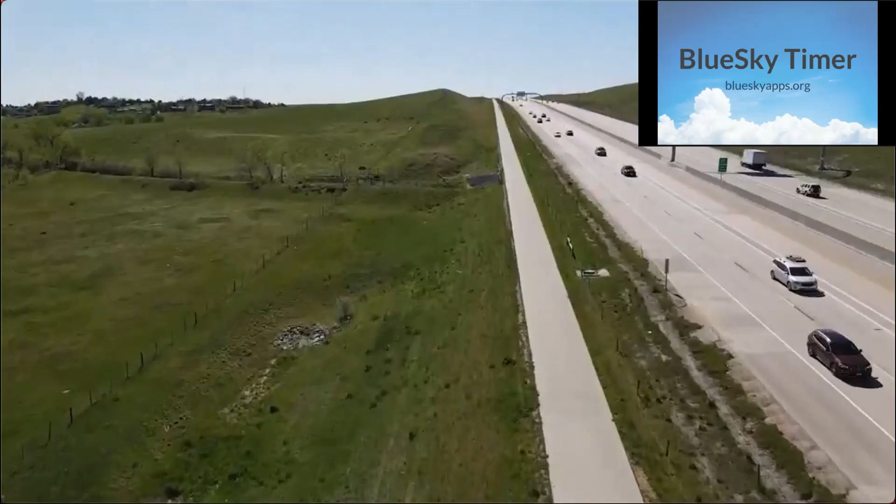US 36 Bikeway is an example. The Bikeway connects Boulder and Denver, Colorado with 18 miles of shared use path. Designed in concert with improvements to transit, the project is envisioned as a complete corridor to serve this fast-growing region. The Triangle Bikeway project begins at 15-501 and NC 54 in Chapel Hill and travels 17 miles east to the pedestrian bridge over I-440 in Raleigh.

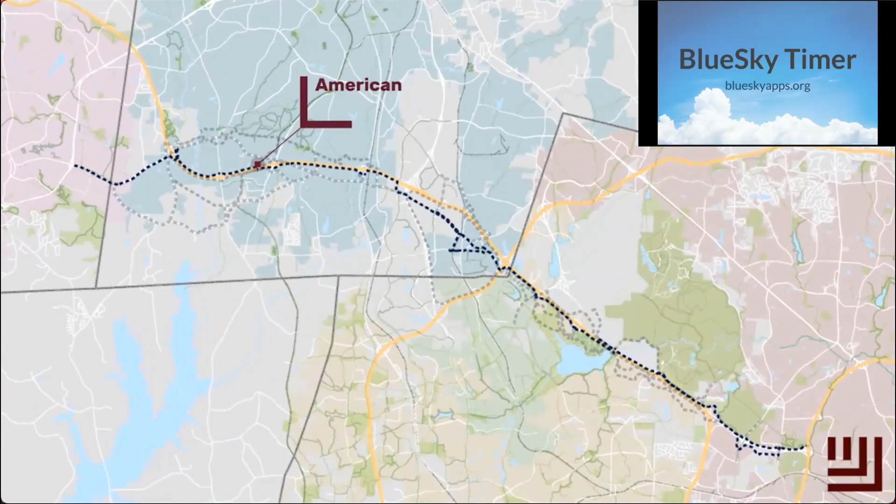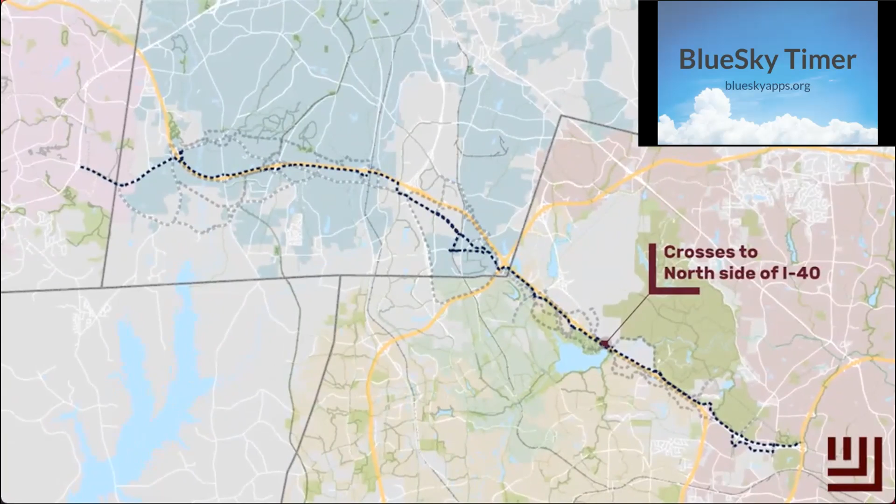We utilize the existing American Tobacco Trail bridge to cross to the south side of I-40. We shift to NC 54 through RTP, which will connect to existing trails and transit. From RTP moving east, the route will cross back to the north side of I-40 and continue along Wade Avenue to the pedestrian bridge over I-440 in Raleigh. The following rendering gives us a glimpse of what users will experience at the proposed pedestrian bridge at NC 54 and the general relationship of the path to the interstate.

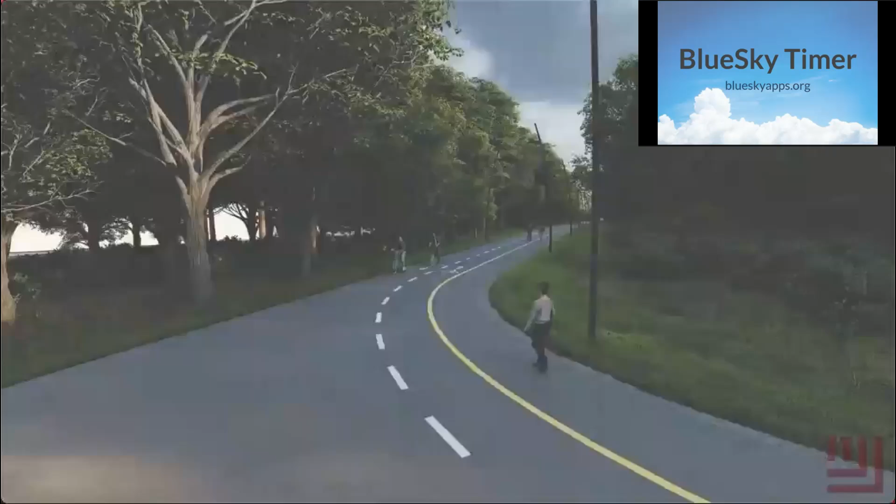So Iona, thank you for that fantastic video and excellent narration, and just good to see what the future of multimodal cross-regional mobility can be. So we're excited about that. And we're going to continue, in fact, with that same theme.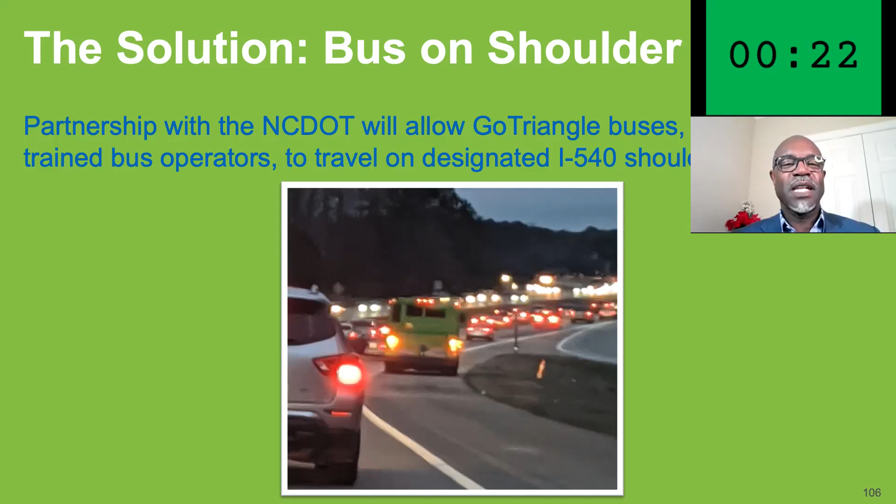Next slide, please, Natalie. So why is that important? Because the objective is to keep our buses on time. It is imperative that we do so as part of this multimodal system that was discussed earlier, and Joe has so adequately discussed. We want to make sure that we instill trust in our public, so that they will take advantage of public transportation opportunities.

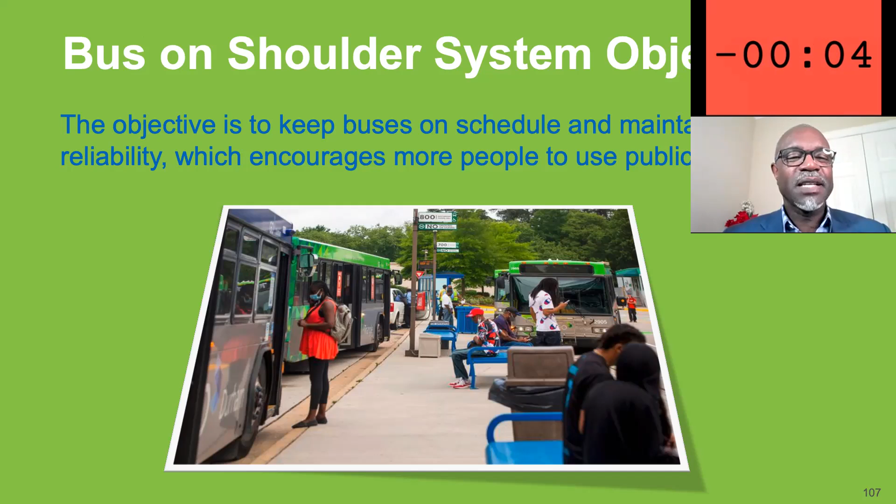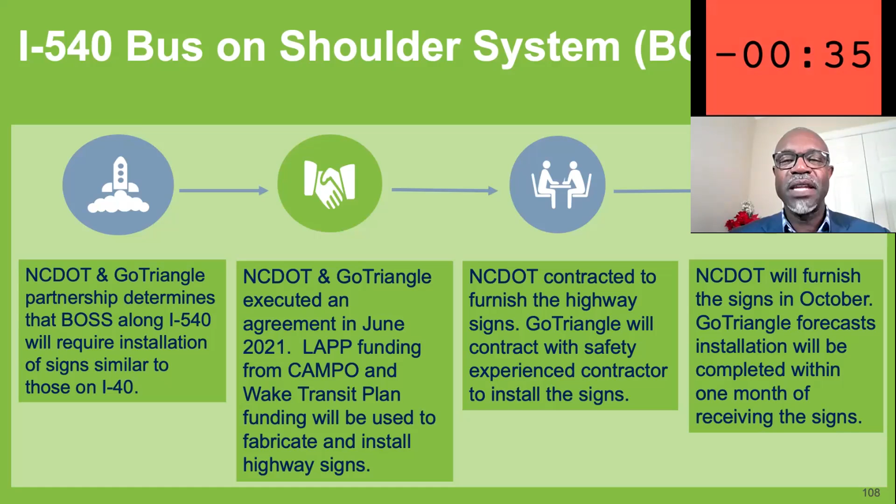Next slide, Natalie. All right, so finally, the process to get us to bus on shoulder on I-540 would be to have NCDOT go into an agreement with us, which we reached in June of this year. It's fully funded through CAMPO funding and also through Wake Transit Plan funding. We have an agreement so that NCDOT will provide the signage, and then we will provide the installation, and we plan to complete that installation in the October timeframe of this year.

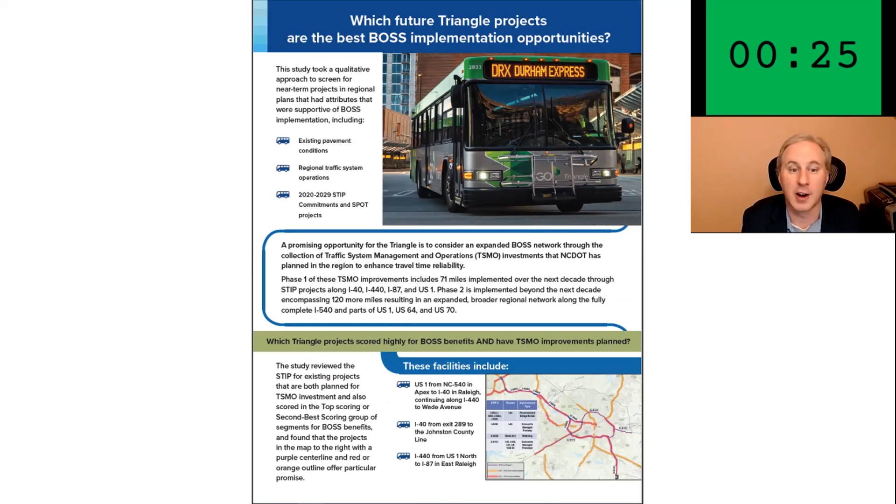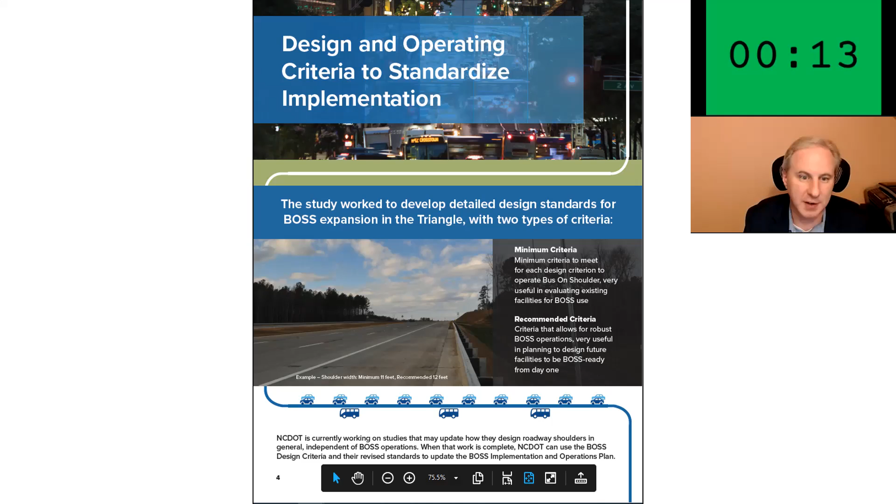Patrick, that was awesome. That was awesome. I mean, the RTA phrase is, let's get moving. You did exactly that. That was terrific.

And we are excited to be a partner for that as well, and looking forward to seeing the bus on shoulder system expand in this market and elsewhere. It's important to make sure that our freeways are serving transit in all modes. When we do that, the freeways are the highway backbone for all of us, and transit's critical. Speaking of that, our colleague Joe Furstenberg with DOT is going to talk about freeway and street-based transit. Joe, take it away. Thanks, Joe.

NCDOT, GoTriangle, and RTA partnered on the FAST freeway and street-based transit study aimed at making it easier for people to get to where they're going using a network of reliable, efficient public transportation and multimodal options. The study had a Triangle focus, but included considerations for scalable approaches for transit across North Carolina's communities, urban and rural. The study included recommendations for improving North Carolina roads for buses and includes a statewide FAST implementation playbook that is hosted on NCDOT's website.

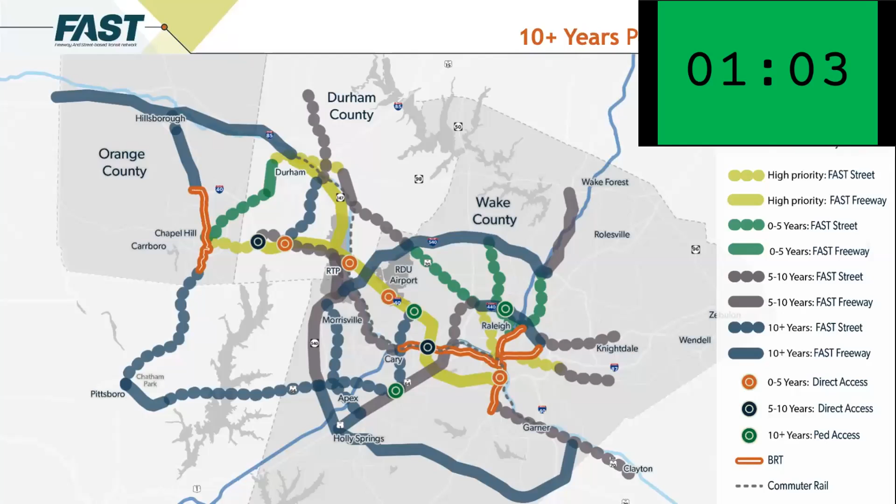Following the completion of the FAST study, NCDOT has been working internally with the roadway design unit to incorporate the transit advantage opportunities into the NCDOT roadway design manual, so that NCDOT staff and engineers have access to design guidance for these transit elements at various stages of project planning, development, and implementation. Furthermore, the NCDOT Complete Streets Policy, updated in 2019, includes that NCDOT considers and accommodates for transit through planning and project development, in coordination with state, local, and regional stakeholders to ensure North Carolina communities have access to safe, reliable, and efficient public transportation options.

And I'll turn it back to you, Joe.

Joe, appreciate it. Appreciate your remarks. Appreciate the partnership on this study. This was a study funded by the department and by Go Triangle, and also received funding from the Turnpike Authority. It shows a true broad commitment to using our freeway and street-based systems for transit and transit advantages. If you want to download this, you can see that information there. If you forget that site in the future, just Google NCDOT, or go to ncdot.gov, and search NCDOT Fast Vision, it will come up as well. We really appreciate partnering with you all, and even this slide makes it even better with the new things that are coming. Let's move to the next section of our meeting.

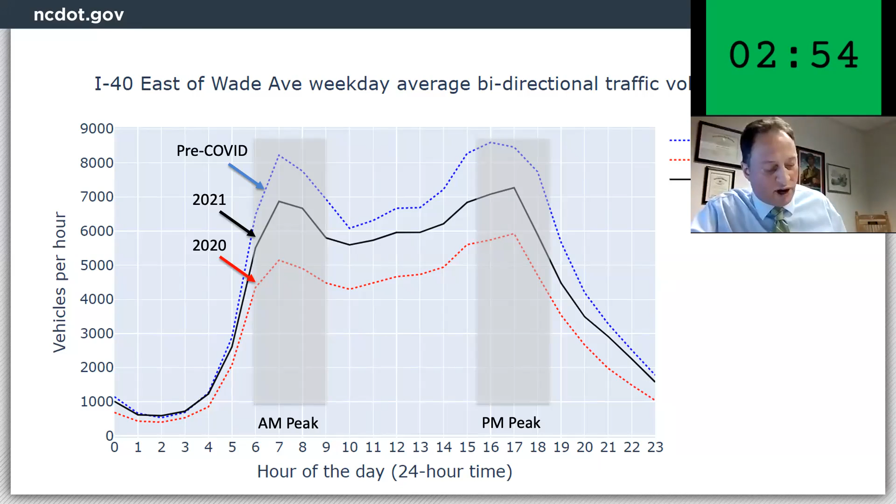This is one location example on I-40 in Wake County that shows traffic volume levels compared to before COVID. It's not necessarily indicative of all traffic volumes across Raleigh, though it does show similar trends. The top blue line shows the weekday average volumes in September 2019. The red line shows volumes during September 2020. The black line is for June 2021. The data shows lower volumes and flatter peaks during 2020 compared to pre-COVID levels, and the 2021 line shows the peaks are more pronounced during peak periods. This location also shows that volumes have not yet returned to the total volumes of 2019, the pre-COVID times.

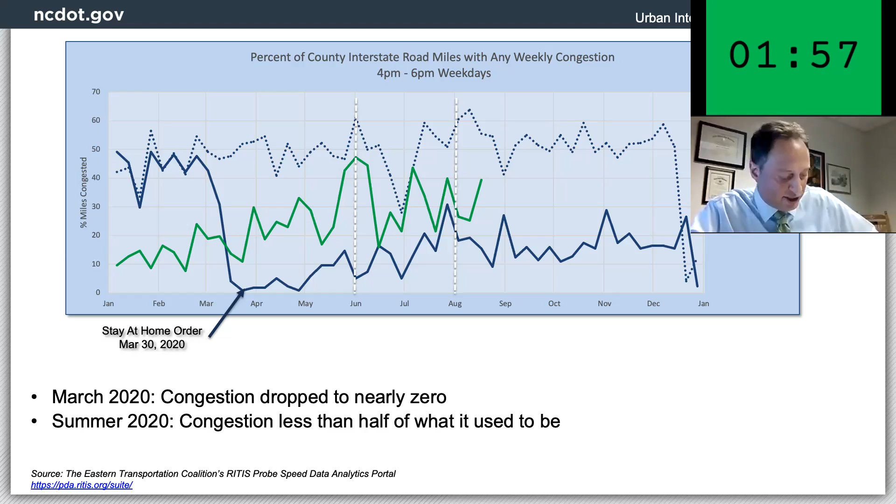During the summer of 2020, between the two white lines, you can see the percent of congested roads began to increase, though it was still half of the summer 2019 congestion. As you follow the dark blue 2020 line to the green 2021 line, you can see congestion increasing and following the seasonality peaks and troughs of 2019, but not quite at the same levels.

At the end of the green line, it indicates changes in August, which are not following the 2019 or the 2020 trends.

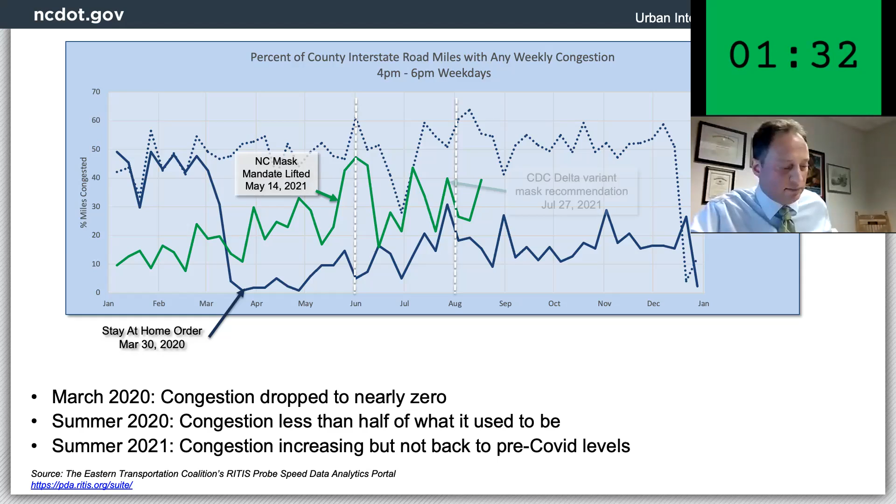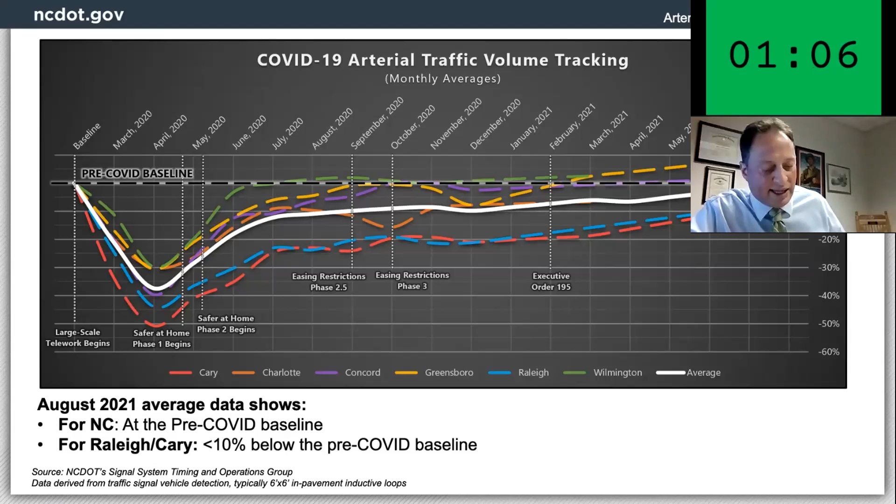To summarize, the trends between pre-COVID, 2020, and 2021: volumes are returning for the state, but the triangle volumes have not quite returned, both for the arterials and the freeways. Congestion is returning on the interstates, but not quite to pre-COVID levels. Crashes have decreased since '19, and unfortunately, fatalities continue to increase.

We're keeping a close look at the data for August to see if changes due to dynamic Delta variant conditions and effects, as well as returning to in-person school and work, will affect the trends.

Wow, look at that, right on the dot. There you go, Joe. Back to you.

That was awesome, that was fantastic. I actually got a question for you, Dom.

So the numbers about the fatals being where they are now, do you all have a sense of what's causing that, and what could ameliorate that?

So we knew back in 2020 it was speeds. There was a lot less congestion, so when there's less congestion, people were driving faster, and there were fewer crashes because there were fewer people on the road, but they were having some pretty nasty crashes.

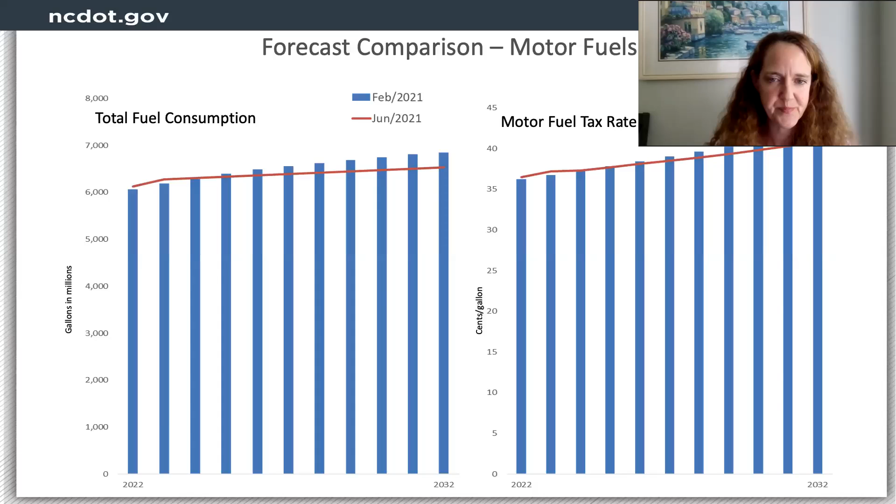I used two charts to show the impact, gallons and dollars. For you, I decided to use gallons. This indicates, purely from the increase in fuel economy when people are changing out cars, that the average driver is going to be buying about 60 fewer gallons a year by 2025. That's about $23 less per driver. When you think about that in monetary terms, it's pretty significant, and that adds up, cumulatively, to a loss of 1.8 billion gallons sold compared to what would happen with today's fleet.